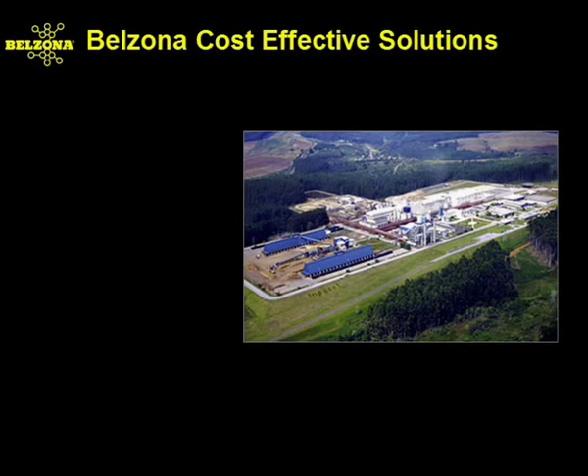At a time when capital dollars are tight for pulp and paper companies throughout the world, maintenance of mill equipment becomes even more important. Rather than replace expensive equipment or absorb the price of an unscheduled shutdown, mill operators are constantly using Belzona as a cost-effective means of solving their mill maintenance problems.

Belzona's coating and rebuilding materials have been used to stop the cycle of erosion-corrosion, prevent unscheduled shutdowns, restore operating pressure, inhibit stock contamination, and even provide a safer working environment around many fast-moving pieces of equipment. In fact, the Belzona consultant is often regarded as an integral part of the mill's maintenance team.

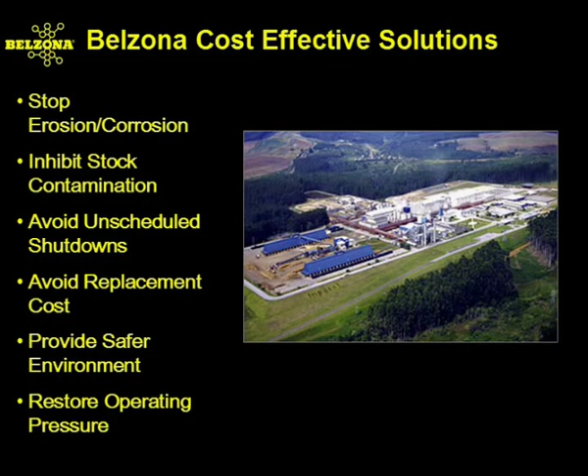From tree to paper, there are roughly 11 areas in the pulp and paper making process. Each of these processes will vary according to the type and age of the plant and the products being produced. However, all have taken advantage of Belzona's polymeric materials.

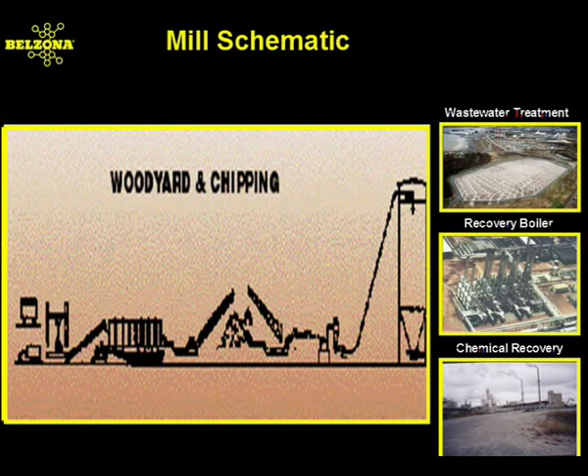Some areas, like the woodyard, mainly suffer from abrasion, and the resulting wear requires costly repetitive maintenance. Whatever the service, the Belzona consultant will be able to provide you with a cost-effective solution to many of your mill maintenance problems.

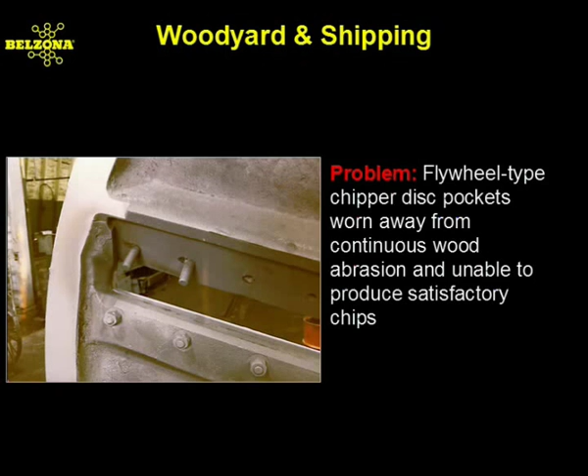This flywheel-type chipper disc requires proper speed and maintenance of the knives to produce satisfactory chips. As you can see, the wood is very abrasive and has severely worn away the profile of the chipper pocket. The entire repair usually requires a full-time welder and costs in excess of $7,000.

Alternatively, the pockets have been rebuilt and coated with an abrasion-resistant polymeric Belzona material. The repair is designed to rebuild to specifications the eroded pocket profile, and then effectively resurface the area to provide protection against abrasion, as well as the required finish.

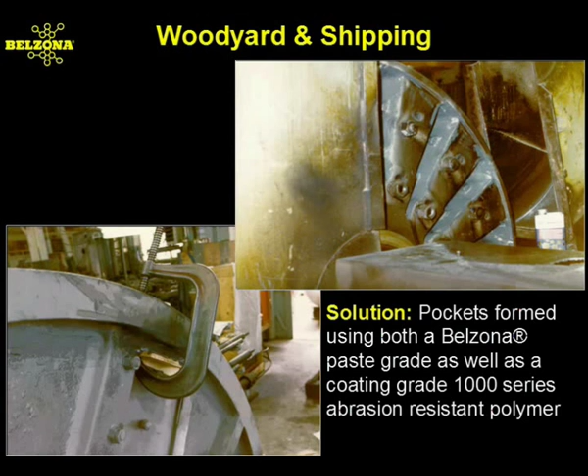All the pockets can be rebuilt and coated, and the assembly cured in under half a day without added heat stresses to the unit. Depending on the diameter of these discs, replacement costs can easily exceed $15,000. Typical applications are durable enough to last 4 years with continual use, and annual touch-ups of high wear areas are recommended.

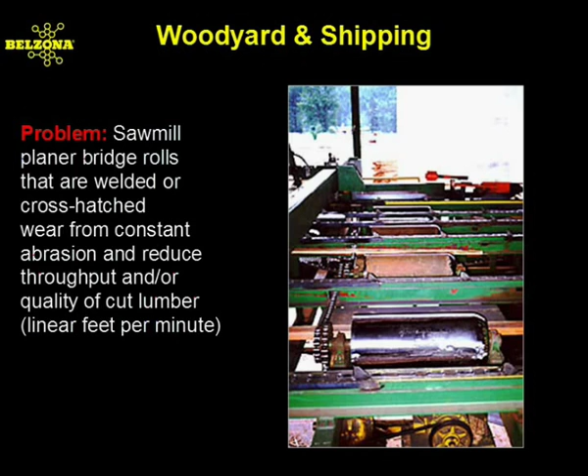Maintaining a positive grip system on products as they travel through the production path of the mill can help ensure that production is not interrupted. Traditionally, fluting, rubber lagging, or profiled metal surfaces such as diamond plate are regularly polished, producing lost efficiency through the loss of grip or drive.

Belzona's polymeric grip system is a very versatile and efficient system, easily applied to most surfaces without dismantling the equipment. This application process helps reduce slipping and maintenance costs associated with equipment replacement.

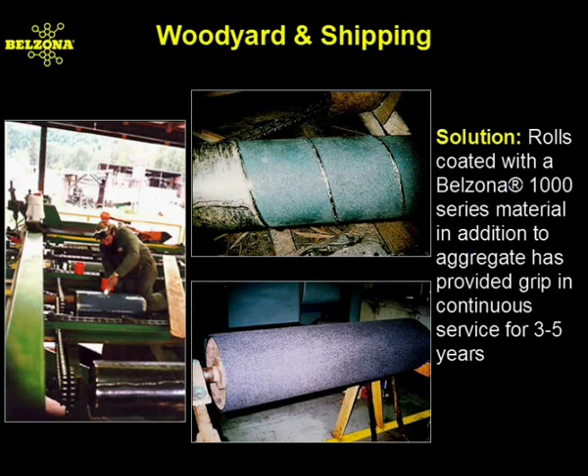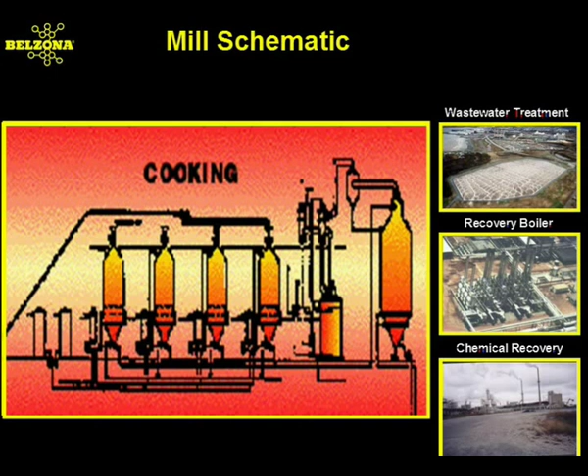In contrast, the cooking area is constantly affected by a highly aggressive and corrosive environment. The protection of structures and equipment subject to destruction by chemical attack has long been a problem throughout the mill. For more than 4 decades, the industry has looked to Belzona's expertise to achieve maximum protection against the rigorous demands of this system.

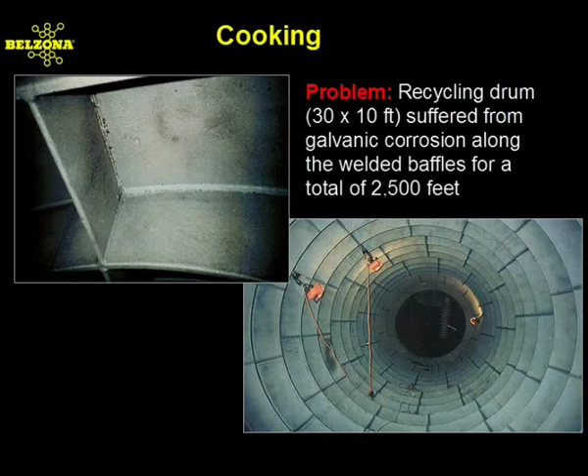This 30-foot by 10-foot recycling drum suffered from galvanic corrosion along the welded baffles. This drum operates at a pH of 10 and a temperature of 120 degrees Fahrenheit. After only 3 years, this $9 million unit had 70% of its 2,500 feet of liner weld corroded.

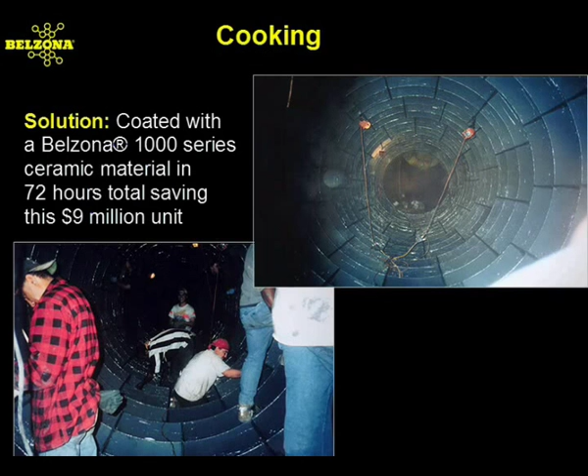At a downtime cost of $250,000 per day, Belzona was used to rebuild and protect the internal structures of the drum. After only 72 hours, the drum was completely protected against the harsh chemical environment and capable of withstanding the introduction of the occasional foreign object as well as other abrasive elements.

As we move further downstream of the pulping process, we come to the screening section. In most pulp and paper mills, some type of stock screening is required to remove oversized, troublesome, and unwanted particles from good paper-making fibers. With this in mind, all screening mechanisms are under constant attack from erosion and corrosion, and the critical aspects of maintaining flow and consistency are sometimes compromised.

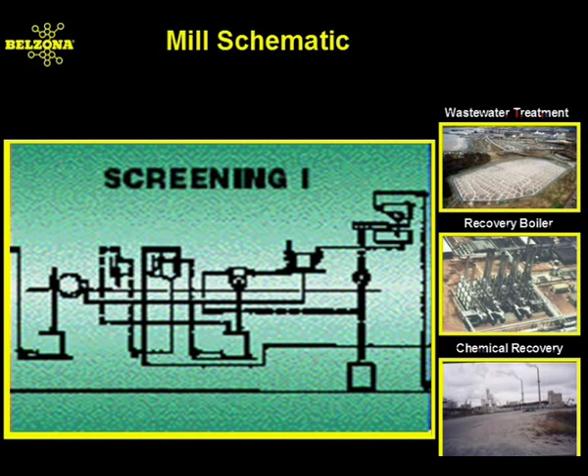In fact, of all the areas in the mill, this screening section perhaps benefits the most from the use of Belzona's high-performance polymeric materials. This pump is the largest pump in the entire paper machine system, and the demands on it are very exacting.

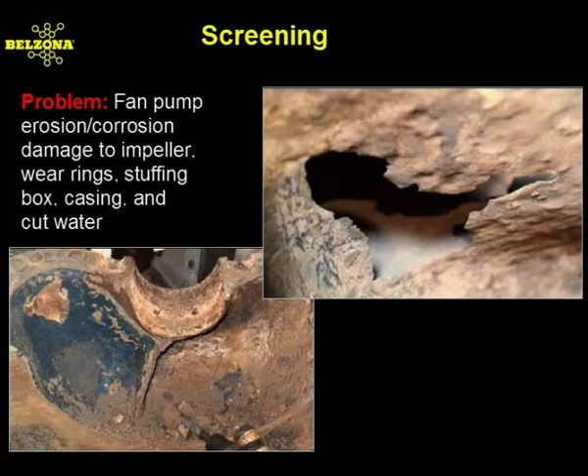Unfortunately, these units are often overlooked, and neglect can lead to an unscheduled shutdown. In this case, the 4-year-old primary fan pump had suffered severe damage to the casing, cut water, stuffing box, wear ring seats, and even the entire rotor assembly. In fact, the replacement cost is in excess of $60,000.

In this particular case, the pump was brought back to tolerances with Belzona's abrasion-resistant rebuilding and coating-grade materials. These compounds are entirely resistant to pulp stock, and after 10 years of uninterrupted service, has twice required only minor touch-ups.

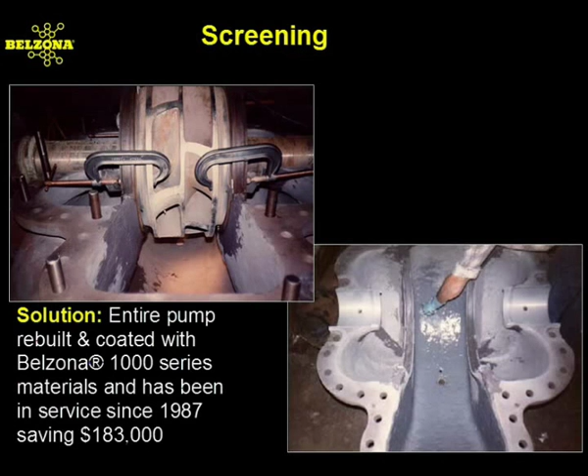Alternatively, the primary fan pump would have been replaced 3 times since 1987, costing the company over $180,000. Pulp and paper mills usually receive pallet loads of knife gate valves because of their frequent use and the abrasive environment they are in. Typical problems associated with pulp and paper service are corrosion, flashing, plugging, cavitation, noise, vibration, and seat leakage.

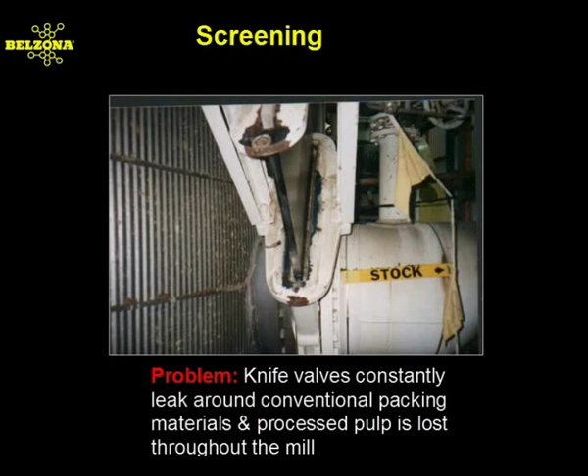Here we can see new packing being poured into the stuffing box area. This 100% solid elastomeric material will not shrink upon cure and forms a perfect seal for the knife. The packing follower remains on top to contain the sealant and has stopped pulp stock from leaking for over 3 years under continuous cycling.

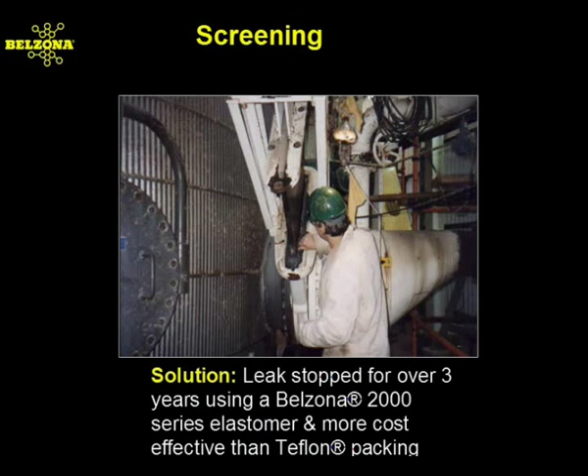This Belzona repair is more cost-effective than Teflon packing and can be easily repaired without complete valve disassembly. In the pulp and paper mills, storage of fiber stock is necessary at appropriate points in the process to provide surge capacity and allow for interruptions in either supply or demand.

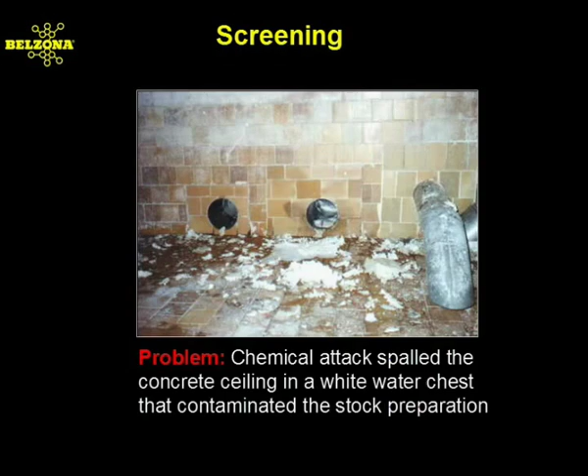These chests are usually tile-lined. However, as you can see here, the concrete ceiling has been severely spalled by whitewater chemical attack. In this case, the loose grout and concrete contaminated the stock and caused concerns regarding pulp quality.

In order to solve this chemical attack problem, minimize downtime, and avoid the cost of replacement, Belzona's lightweight concrete rebuilding and screeding materials were used to restore the structure's integrity. This material is non-porous and will not allow chemicals to deteriorate the concrete or the rebar underneath.

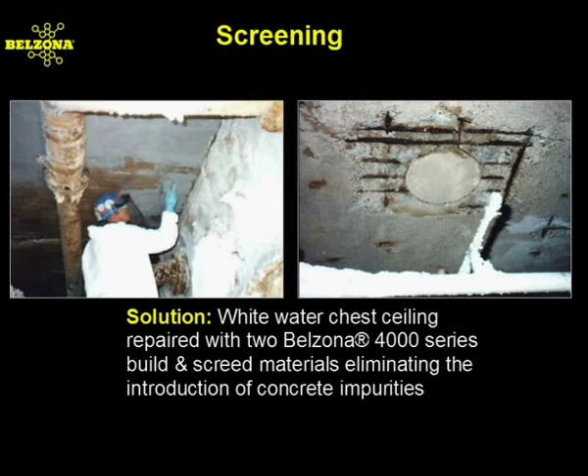After completing this repair, the approach system was no longer contaminated by concrete impurities. Interestingly enough, tile inside similar storage vessels have in fact been repointed using this technology, far outlasting conventional grouting materials.

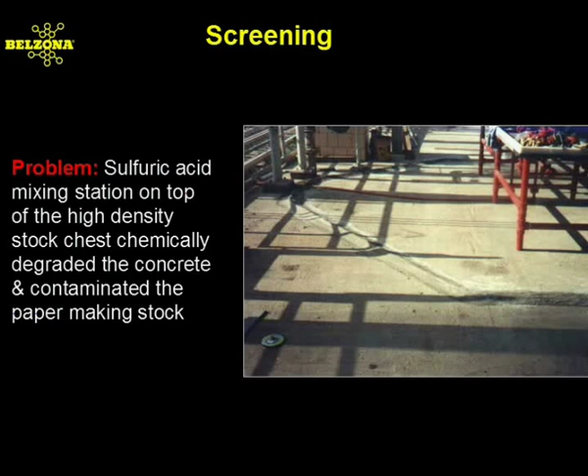Not only did this mill have problems with their high-density storage chests below, but processed chemicals were also attacking the structure from above. This sulfuric acid mixing station chemically degraded the concrete and was contaminating the paper-making stock below.

Today, environmental compliance with local and federal regulations is mandatory, and even small deviations can result in costly oversights. With this in mind, Belzona's highly cross-linked, chemically resistant coating was used to seal the concrete and prevent further ingress of liquid.

This polymeric coating material is capable of resisting sulfuric acid up to 98% concentration under fully immersed conditions, saving this mill the expense of dealing with acid contamination of the stock, as well as contributing to the degradation of the underlying soil.

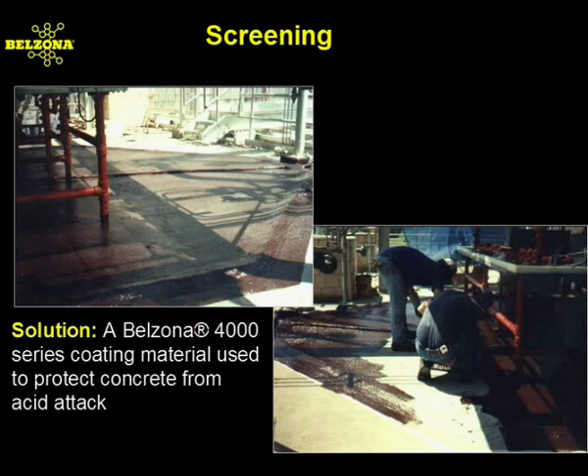The massive dryer section is the most expensive part of the paper machine in terms of capital costs. It is also the most costly to operate in terms of energy requirements. In actuality, the paper drying process is a very simple one of receiving sensible heat from the dryer cylinder and then flashing it off.

However, when downtime occurs in this section of the mill, the costs are usually in excess of $10,000 per hour and can be as high as $100,000 per hour.

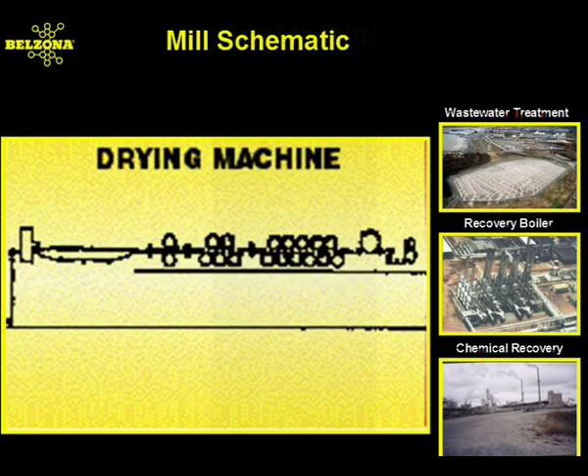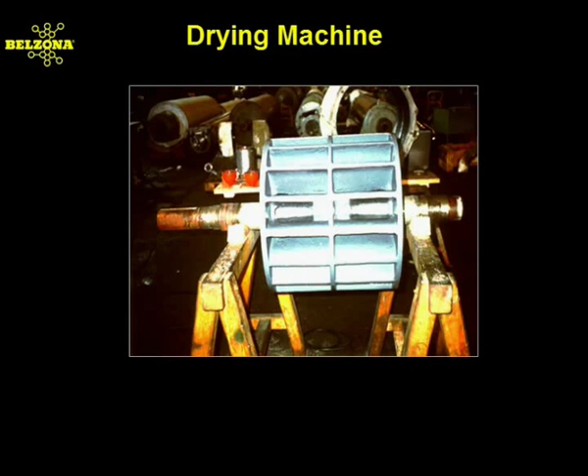This corroded vacuum rotor was unable to provide adequate vacuum pumping in a small recycling mill in Italy. The repairs were completed with Belzona's abrasion-resistant rebuilding and coating-grade materials. Following the repair and balancing, the rotor was put back into service and protected from future attack from carryover.

This saved the mill the replacement cost of $15,000. In fact, the rebuilt rotor is not only as good as new, but better.

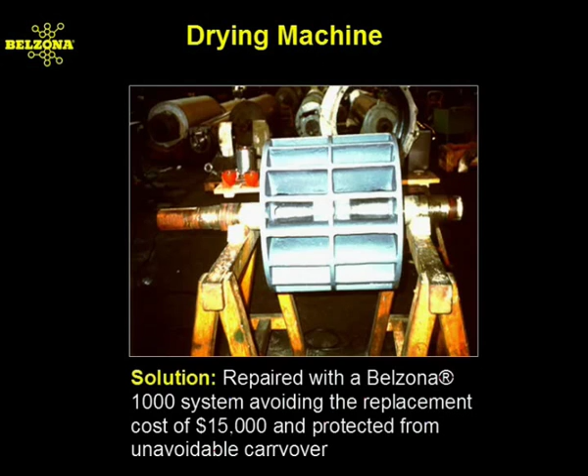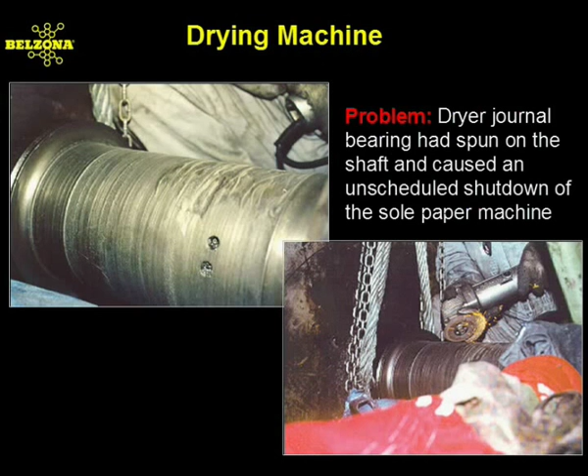The following is an excellent example of what happens to a pillow block bearing on a dryer journal shaft when you have a loss of lubrication or contamination. This large pulp and paper mill in Austria had exactly that problem, and conventional repairs would have cost the mill in excess of $185,000 in related downtime costs. Alternatively, the repair was completed without taking out the dryer journal shaft and avoided the need for expensive disassembly.

Belzona's two-component paste-grade metal repair material was used to rebuild the shaft to the proper outside diameter. Using Belzona's forming technique, the entire repair was done in 5.5 hours, saving this mill well over $100,000. This repair was completed in 1996 and is still in service today.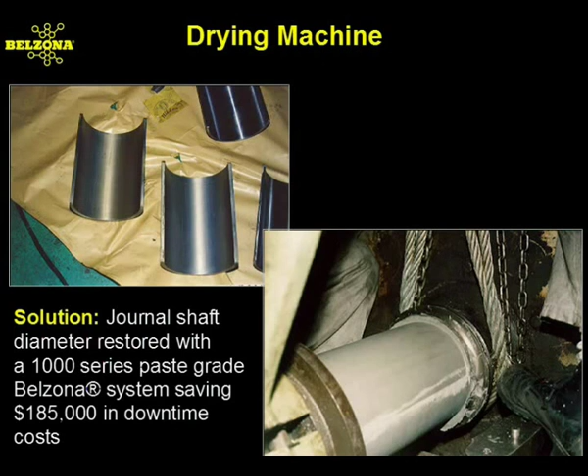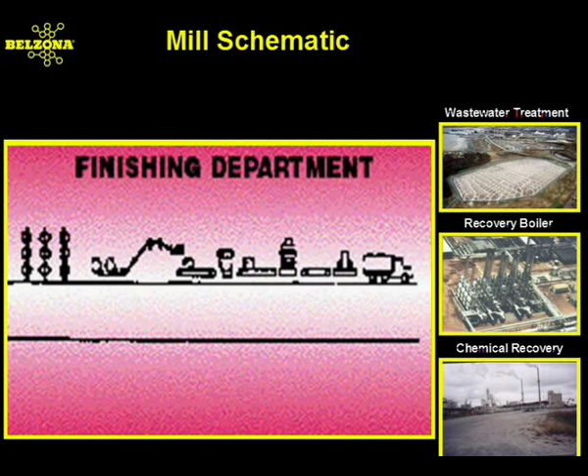Finally, after drying, the paper product must be conveniently collected and shipped out to the customer. This part of the mill is often the cleanest. However, certain problems do exist, and Belzona has been used to provide long-lasting solutions even in this relatively favorable environment. In this mill in Mississippi, the calender stack floor area became a safety concern, especially around fast-moving equipment. Oil, water, pulp, and paper were being introduced onto the working surface, which created a very slippery environment.

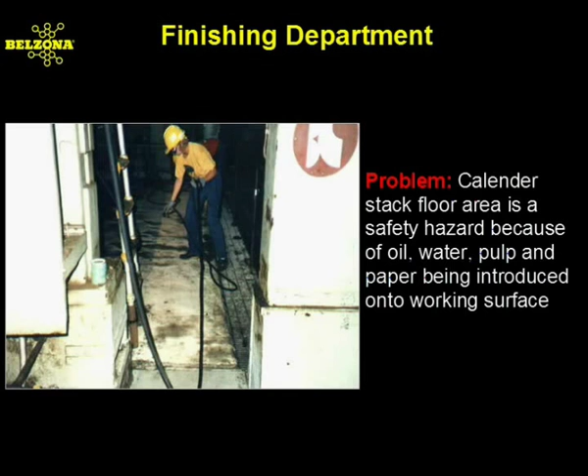Belzona's Granogrip system was used to provide a safe, non-skid surface. This coating can be put down in a variety of designs and has been resistant to mill traffic and process chemicals since 1987. Other systems have been tried, but none were able to satisfactorily provide an effective solution. Only Belzona has proven to stand up to this harsh environment and virtually eliminates the possibility of slipping.

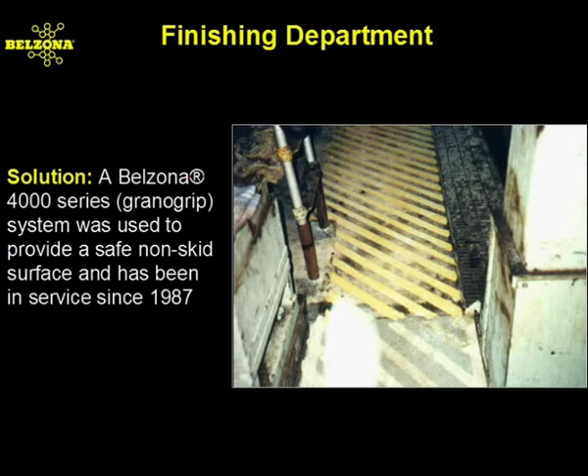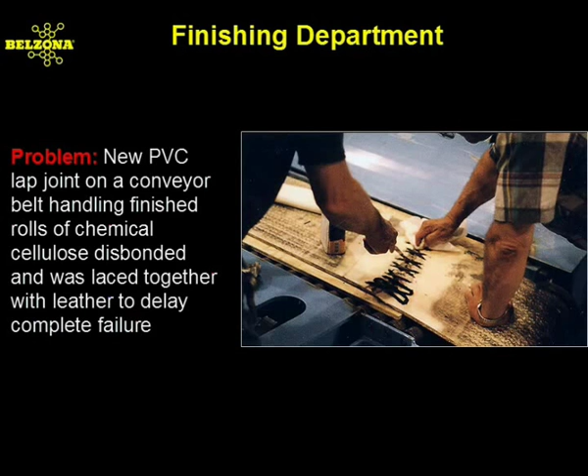Great lengths of belts contribute to the enormous amounts of solids that must be continually moved throughout the mill. Recently, a new PVC lap joint on a conveyor belt handling finished rolls of chemical cellulose disbonded and was temporarily laced together with leather to delay complete failure. The nearest vulcanizer was located over 3 hours away in Tampa, Florida, and this mill in Jacksonville couldn't wait for the conventional repair. A permanent repair was made with Belzona's quick-curing elastomeric rebuilding compound.

The repair was completed during lunch hour, preventing a costly downtime. Without the use of Belzona, this mill would have had to shut down the entire finishing department. In fact, 1 year later, this material is still providing the necessary adhesion, and continuous belt operation under tension has not contributed at all to joint deterioration.

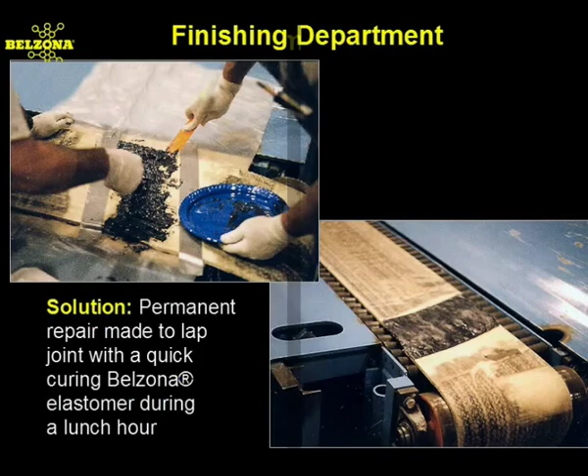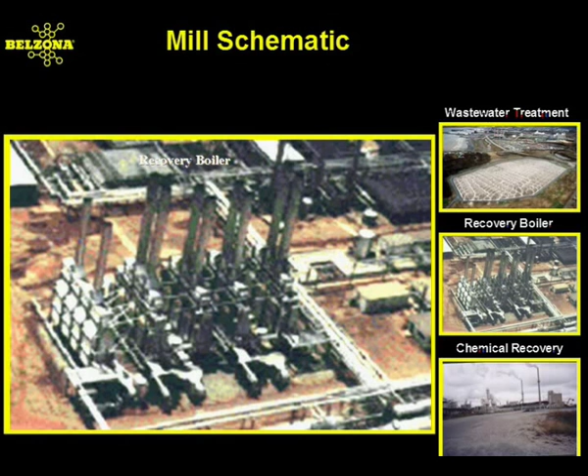The bulk of the water removal from the black liquor is accomplished in the multiple effect evaporators. The major advantage is the high steam economy and energy recovery. However, the black liquor and the different metals used in the materials of construction results in galvanic or bimetallic corrosion. In April of 1991, a pulp and paper mill in British Columbia, Canada had grooves eroded and corroded around the tubes in excess of 1/8 of an inch.

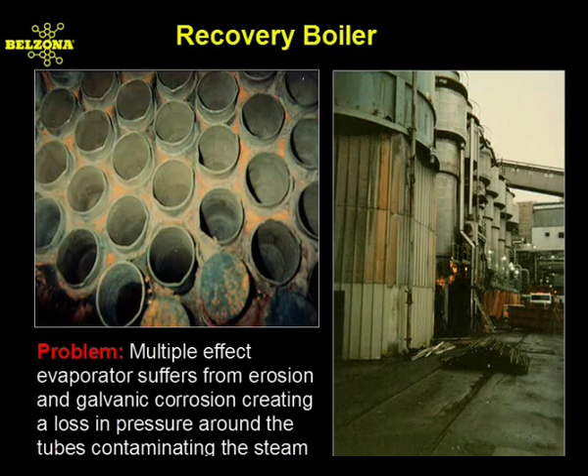In this case, leaks had developed between the stainless steel tubes, the mild steel tube sheet face, contaminating the process steam. Belzona's densely cross-linked heat-resistant polymeric coating material has been used to successfully eliminate this process of erosion-corrosion of the substrate. This entire procedure was completed without added heat stresses and the introduction of dissimilar metal components. In contrast, both of these issues would be present if conventional welding techniques were employed. Subsequent development of leaks between the tubes and the tube sheet face have been non-existent for over 36 months.

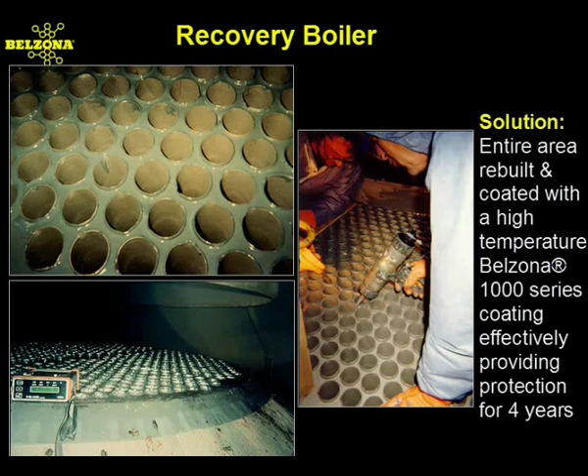Without preventative maintenance measures, operators are eventually forced to bear the cost of retubing these large units, which is over $800,000. Corrosion of carbon steel in kraft white liquor is a chronic problem extensively studied. Corrosion rates for stainless steel are generally much lower than carbon steel. However, coupled with erosion, this material of construction exhibits failure in a relatively short period of time. In order to combat this cycle of degradation, these mills all use Belzona to restore critical equipment and fittings to better than their original state.

History has shown that taking advantage of this leading-edge technology will provide cost-effective solutions to mill maintenance problems. Actually, we can assist you with engineering solutions and address the root cause of the problem instead of just treating the symptoms. So, how can we help you?